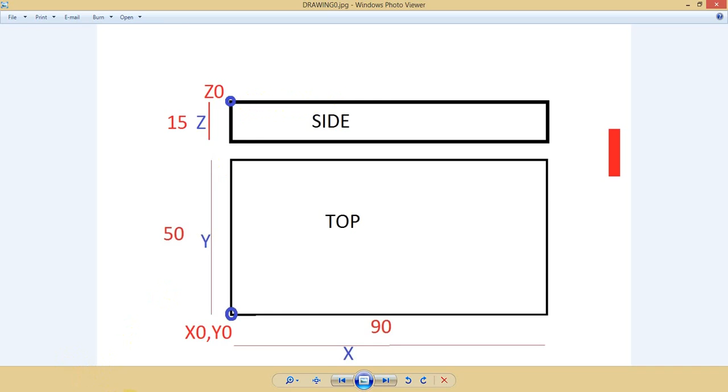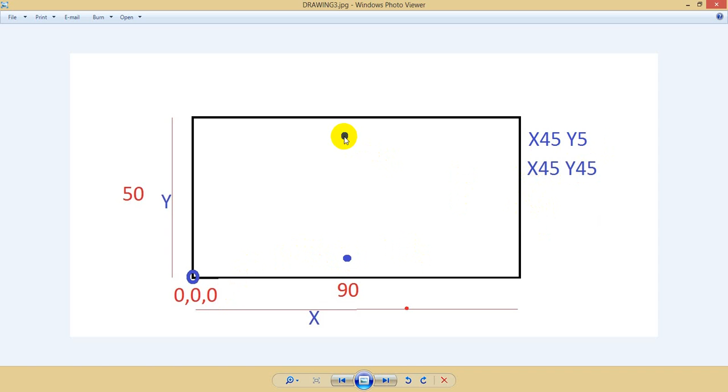Now, again, take a cross paper and make a drawing of your workpiece with two dots. One at X45, Y5 is this position, and the second is X45, Y45 is this position. From these, we will make a circle on our workpiece using the G code.

So in order to do this circle, I'll go back to my CNC Motion CNC base and click on New File, and this is my program, where I write my G code. As you'll notice from the first tutorial, the first line is the same.

G90 M3 S2000 - I won't make a comment, you should know this by now. Next line is also the same: G0 X0 Y0 Z10.

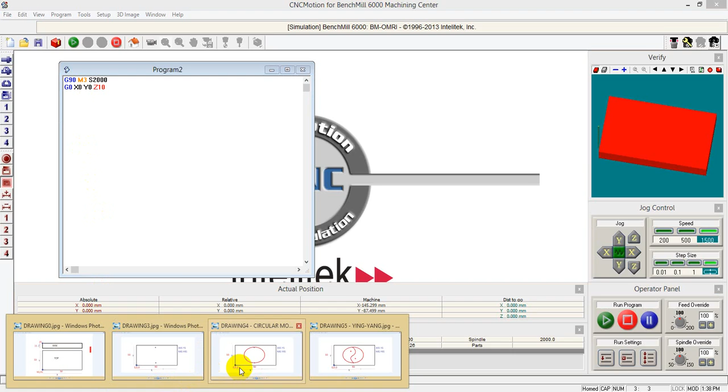Next command is we go to this coordinate here, which is X45 and Y5. So we just write X45 Y5 and then say Z2. All these three lines are done with the G0 command, which is rapid movement, because I don't touch the workpiece yet.

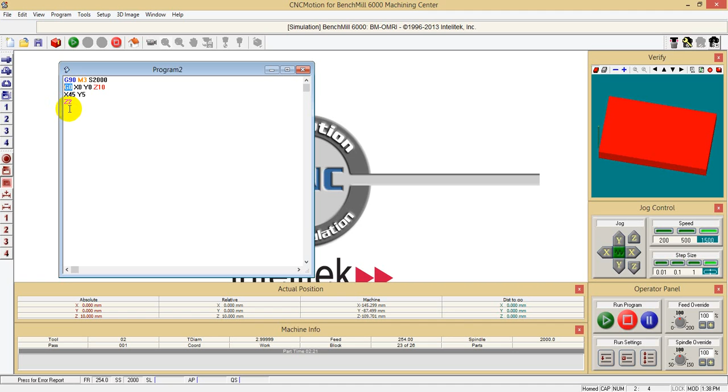Next line we go to G1 Z-2 F100. At this point I can verify - we are here. I'll make this a little bigger so you can see where we are.

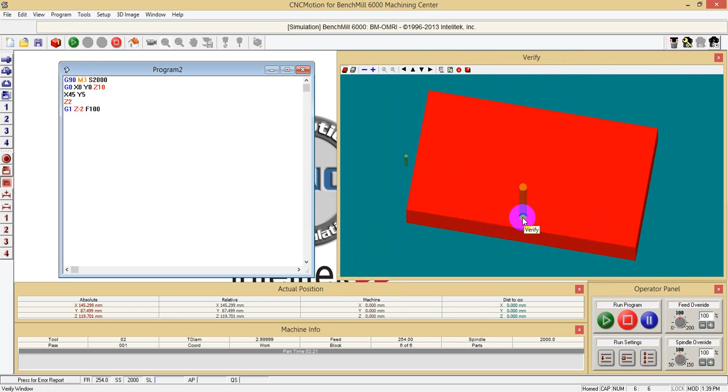Now here comes the new G code. Until now you should have known your G90 M3 S, G0, and G1 - you already know what they mean. Now comes a new G code, and obviously it is G2, and we want to go to our end position, which is Y45 with a radius of 20.

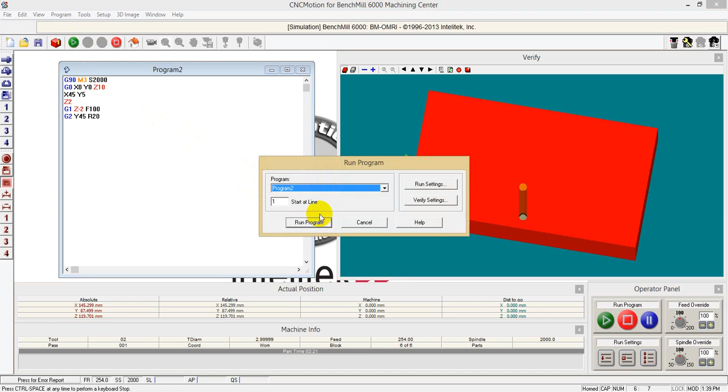Verify, verify, and it's doing a semicircle. And I will make now a comment and let you know what G2 is.

Circular movement clockwise, and you need your R - comment - R is radius of arc.

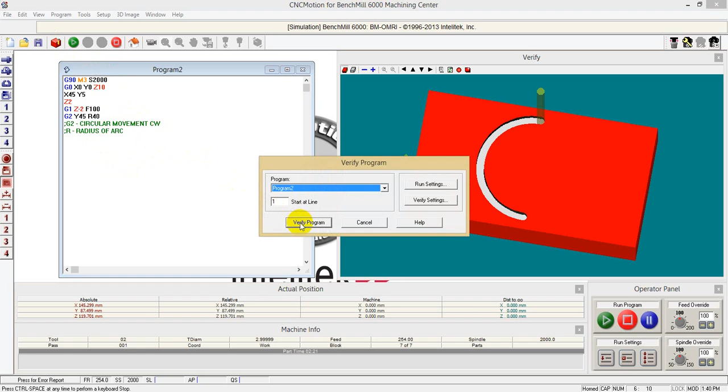So for example, if I change the R to 40, it'll do a different arc, because it is like a compass, opening a compass from here to here rather than from here to the middle. So I'll go back to R20 and verify. You will see that the compass is open from here to here, and then the arc is made.

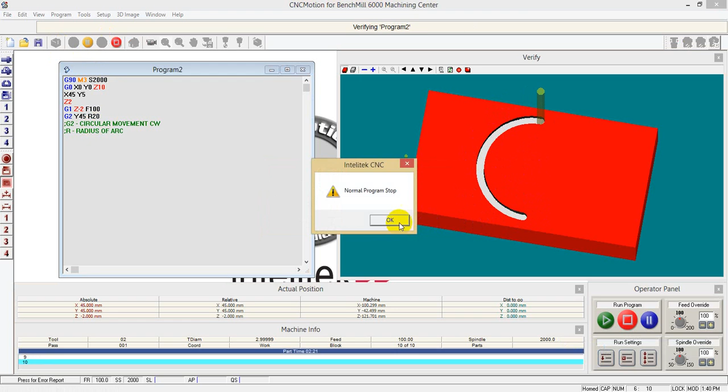Now if I don't make this - I'll just make this a comment with no R - it will give me a bad arc, which means there is something wrong, the R is missing. So I'll get rid of the R and verify again, and we have the semicircle.

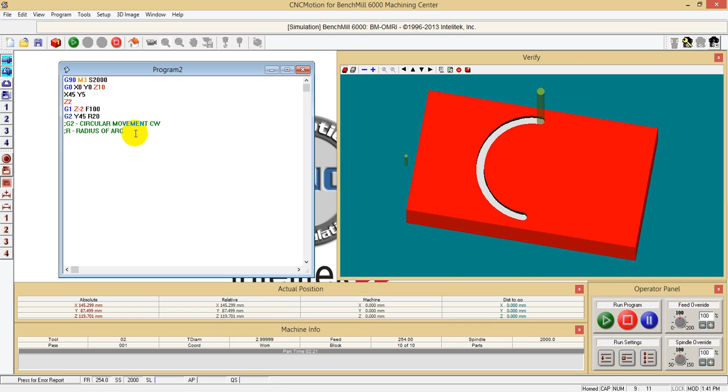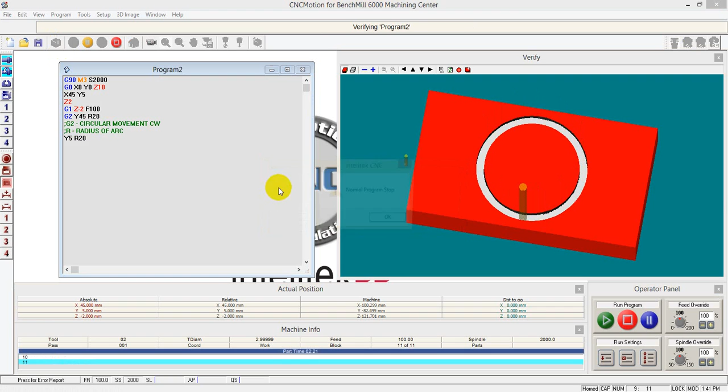We can do only half circle at a time. We can't get the circle to run at one go - one half circle and then the other half circle on a different line, which will say Y5, and I have to have the radius 20, otherwise it does not know where to end the circle. And here we go, we have a complete circle.

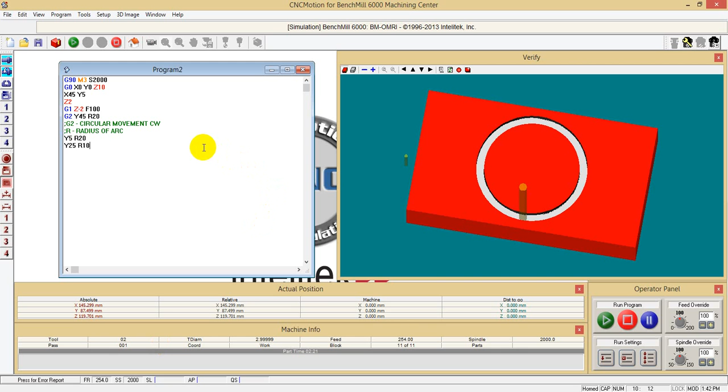Now, after doing this circle, I will continue to make this bad drawing of a yin-yang. So basically I will make another arc here, another arc there, and then do these 2 points of the drawing. If I continue now, I'm still at G2 and I want to go to Y25. I go to Y25 with a radius of 10, and then I verify.

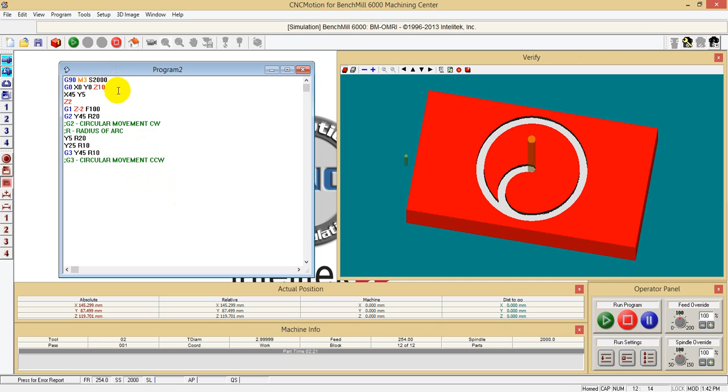It's done that, and now comes a new G code, G3, Y45, R10, where I make a comment - G3 is the same as this, but counterclockwise. So again, verify, it's done this.

Here comes a new thing - we have to lift the mill out of the workpiece. So I say G0, Z2, I'll make with a space, and then we want to go to Y.

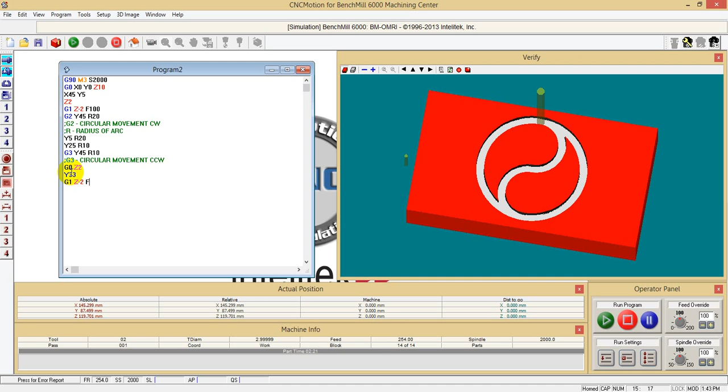Let's do a wrong one. Instead of going correctly, we'll go to Y33. Okay, and then we can say G1, Z minus 2, F100. Verify. We go here - you can see that Y33 is not exactly in the middle of the circle.

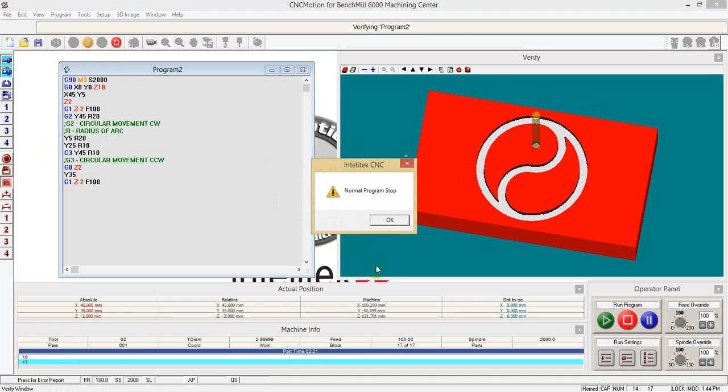So I'll change that to Y35 and verify again. And now it's in the middle.

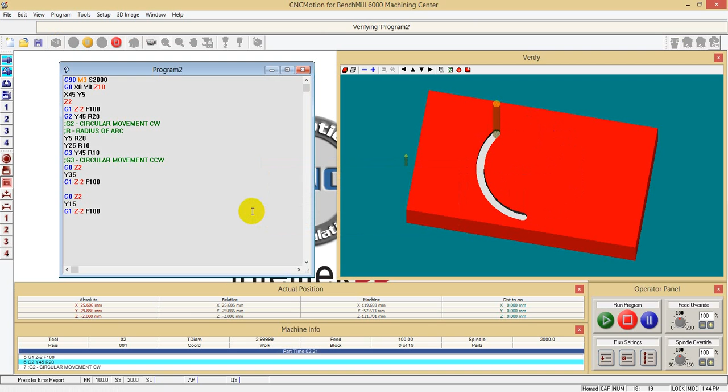And then I say I can actually copy this and put it there. Instead of G0, Z2 out of the workpiece, and instead of Y35 I change to Y15, and then I verify, and we get what we wanted.

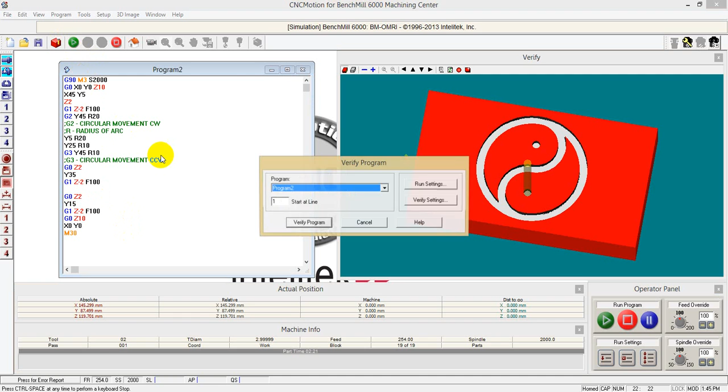Now, last one before last is G0, Z10, space Z10, and X0, Y0, and M30 is end of program. Again, verify - it's doing this and coming back to X0, Y0.

Next thing we do, we go to Window, Run and Edit. You can see here our mill, and if we now run, we can see - okay, drawbar is not clamped, so I stop and we see what's going on.

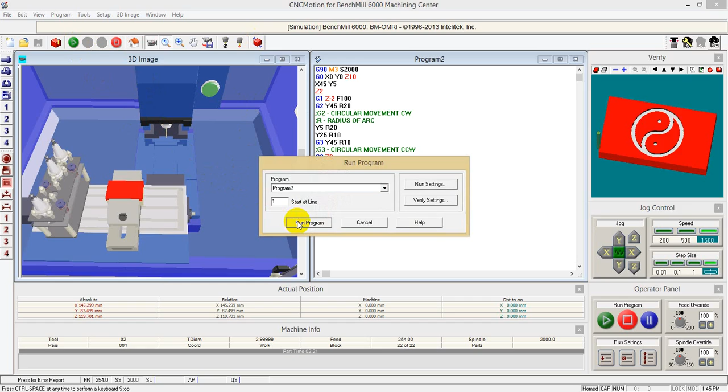Okay, first of all I want to set my workpiece to Z, and now I can run. Here we go. Where are we? Mill is coming down. It's making this.

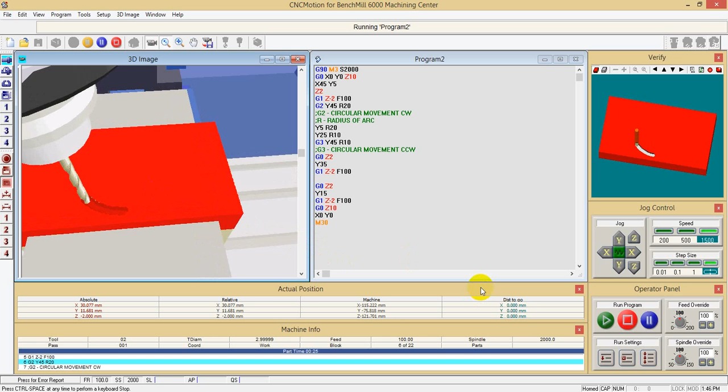Again, I don't change any parameters from what we made, and everything here is made with a feed rate of 100 millimeters per minute, so it's a bit slower than our last program. You can actually make it faster, but we won't do it now.

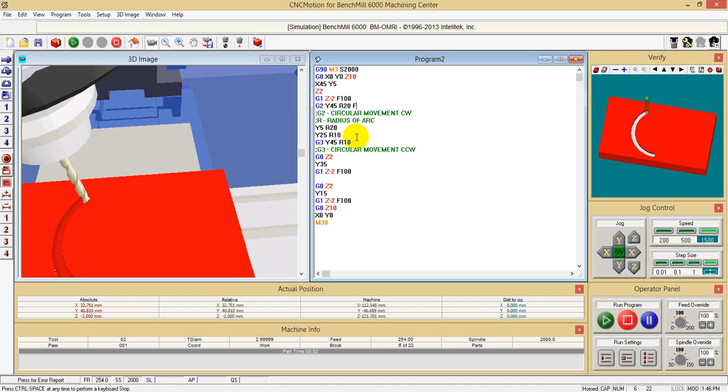You know what? Yeah, we'll do it. I'll stop, and I can change here when it's doing this. I can change the feed rate to 200, and then run again. It'll be faster than before.

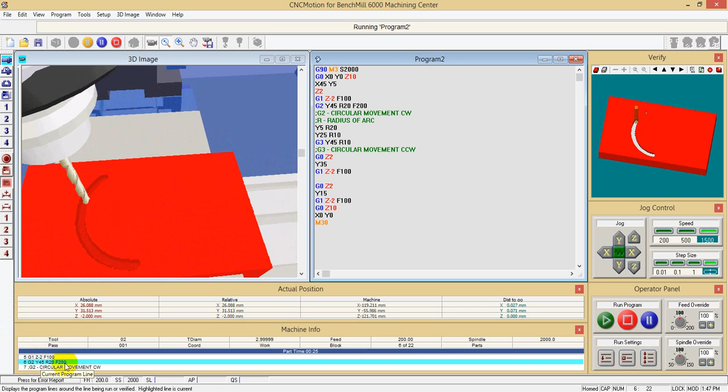And again, you can see here the line that it's at. It's going now to Y45 with a feed rate of 200. And here you can see the actual X, Y, and Z coordinates. Hold on, there we go.

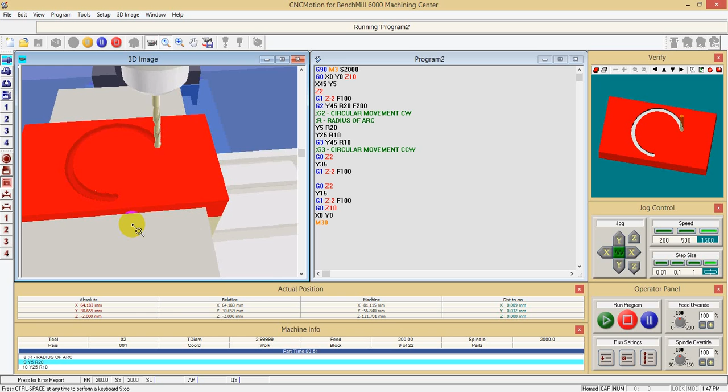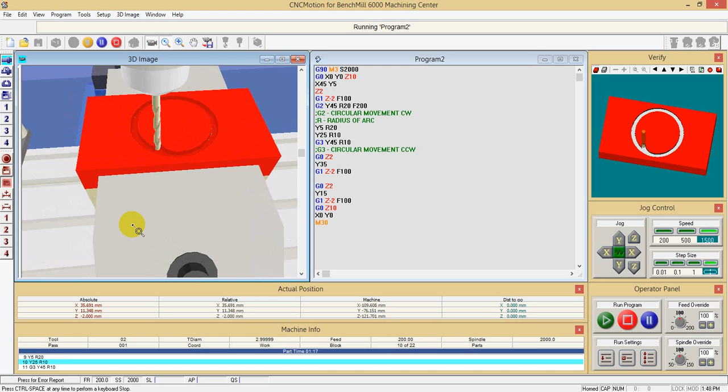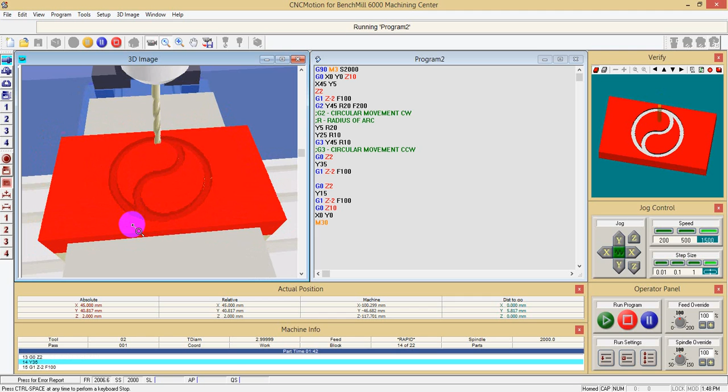That's the circle, and now it's doing... okay, so it's done. Now a few notes for you.

Basically, when you lift the mill out of the workpiece, the G code is G0, which is fast movement, to Z2. No need to go up more than Z2, because 2 millimeters above the workpiece is still above the workpiece. I see some people go to Z10, but it's just a waste of time.

The next comment is when you run your program, have a look at your verify window first. If your verify window is satisfactory, it does not mean that when you run the program your feed rates are correct. Make sure your feed rates are at a maximum of 200 millimeters per minute, and again depending on your depth of cut and depending on the size of your tool.

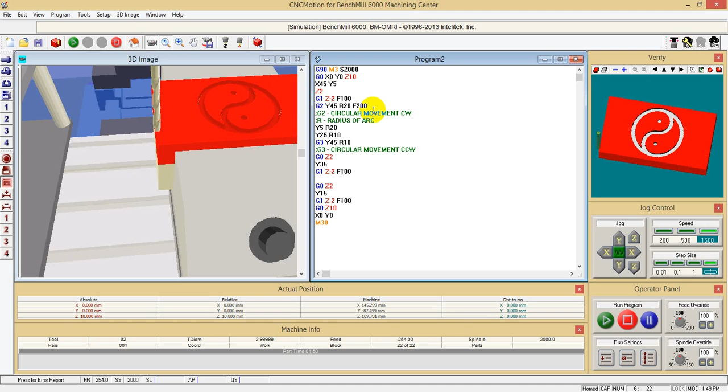Now, this is it for this session. We'll get to a new session in a minute.